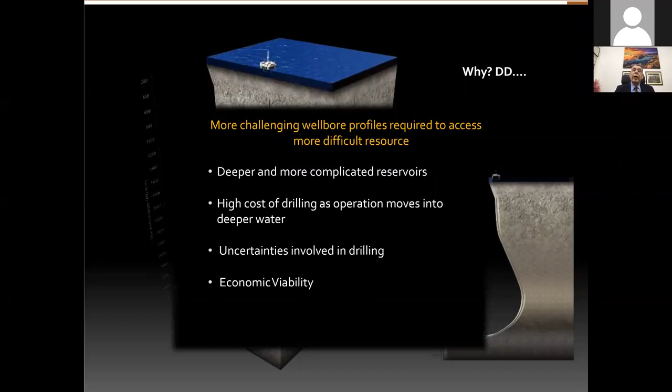How do we drill our wells? In order to access different reservoirs and areas, we use different types of rigs.

Simply, we use land rigs. When we look at it based on the environment, if we're going to drill on land, we use land rigs. If we're going offshore in the waters, we'll use offshore rigs.

Do all rigs are the same? Of course not. Land rigs would vary in size, meaning relying on the depth of the well we actually going to drill. So I may have a rig with the power and efficiency to drill up to 10,000 feet, or a rig that can help me go down to 25 or 30,000 feet. So the type of the land rig will depend on what we actually need to drill.

When we go offshore, things are different. The type of the rig will rely on and depend on the water depths. We could drill wells in shallow, medium, deep, or very deep waters.

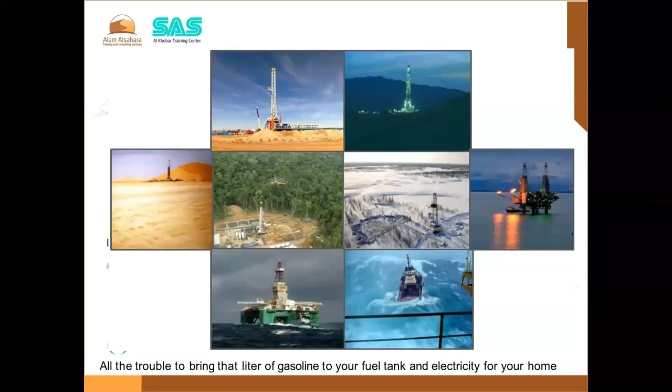Based on that, you'd expect the daily rate, the rental of the rig, is going to be changing. Of course, you're not going to have a land rig with normal capabilities at the same price as a drill ship rig or a semi-sub rig. So the daily rate of the rig, and also we should consider the supporting companies that live on the rig. At the rig site, there would be the rig crew and the rig management, and also the customer representative, and companies like the directional drilling company, LWD company, and so on during drilling. Then during completion and production, specialized people will be on the rig site. So the rig daily rate would vary.

It could be from $10,000 to $50,000 per day, or sometimes the cost is around $20,000 per hour for a more sophisticated semi-sub or drill ship. So the daily rate and cost for deep water drilling could reach up to $500,000 per day. That's why we should have well-planned, engineered wells, so we can actually reduce the cost.

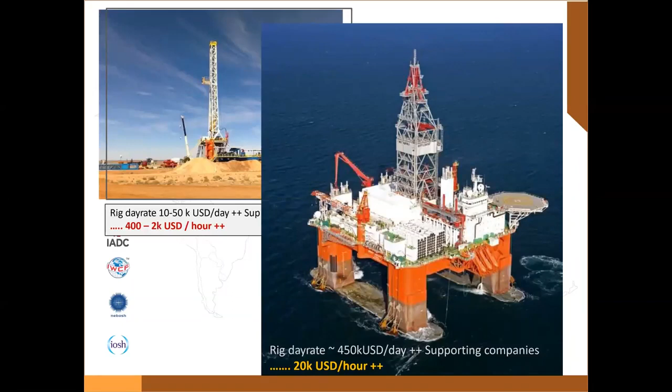What are the key challenges in drilling wells? The challenges include how to identify the wellbore position. We need in a well plan to know where to reach the target. We need to plan sometimes to avoid certain areas like depleted areas, high pressure areas, fractured areas, and faulted areas - that should be in the well plan. We also need to maintain a smooth well profile. This is with regard to identifying the wellbore position.

What about the decision making? The geologist - as the well plan is engineered before the start, the geologist should know from the nearby wells where we're going to drill to. They should know the prospective formations. They should work with the drilling engineers so the well plan reaches the optimum recovery position within the reservoir.

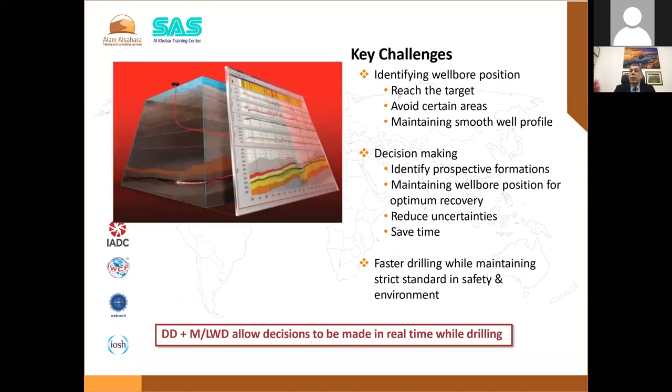We should have more information from the surrounding area to reduce the uncertainties, and all plans should work to save time. Drilling guys at the rig site usually look for faster drilling. We need to drill, but while drilling, you need to maintain strict standards in safety and environment. You need a controlled drilling situation, and this is all reachable.

Then we get to the point that if we're going to see all this and overcome all these challenges, we need to use directional drilling tools plus measurements and logging while drilling tools that will help the on-site specialists, whether a geologist or the drilling people, and of course the people in town, to make real-time decisions.

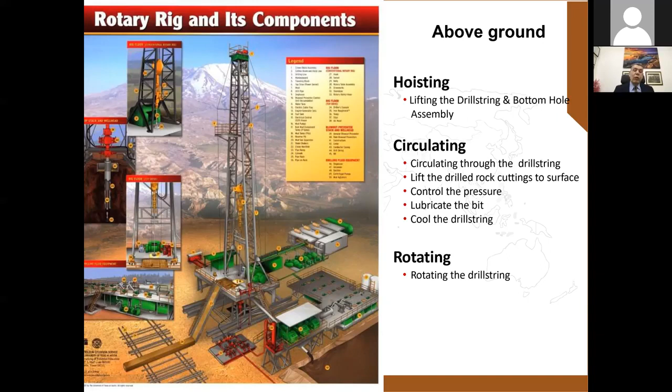We also have rotating equipment that helps rotate the drill string. I'm just talking in general about what rig equipment or components will help us do the job we are looking for, which is drilling a directional well.

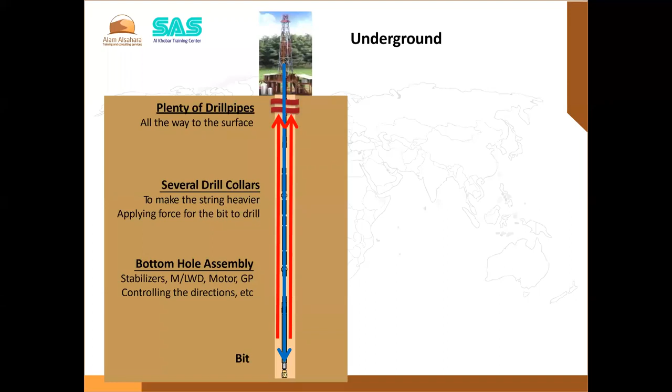The rig is above the surface. Underground, we have plenty of drill pipes. The drill pipes are like the string that connects with our downhole gear, which is what we call the bottom hole assembly, plus measurement and logging tools and directional drilling tools, including motors, rotary steerable systems - we'll get to that later.

So we generally have a lot of drill pipes that we use to drill and reach the depths we want to.

Down near the bottom, among the bottom hole assembly, we also have drill collars - I'll show you soon what the drill collars are - which are heavier pipes that give me more weight, so with rotation I can drill through.

Then there's the bottom hole assembly, which mainly consists of drill collars, stabilizers, and also our downhole gear, which sometimes costs millions of dollars - but it does the job. It's going to be my eyes down there.

The motor, MWD, LWD, and whatever is controlling the well direction sends me more information about the formation. And at the very end is the bit, the tool that will drill through.

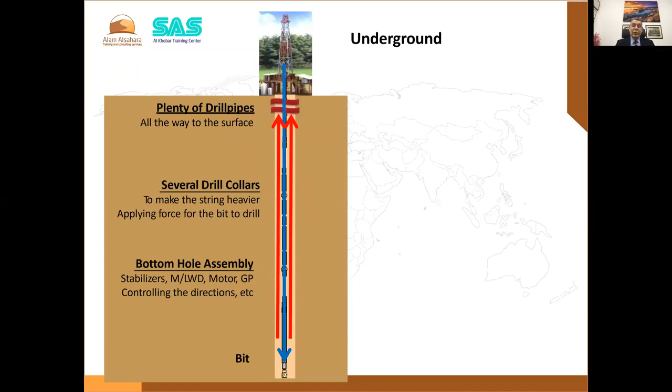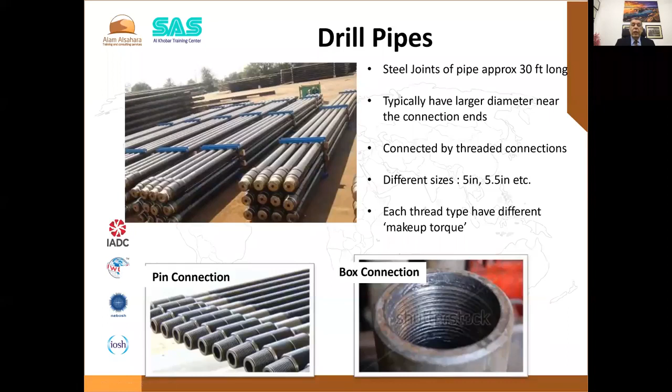Remember, we talked about drill collars. Some drill collars are spiral like this, and some are not. What is best? It's better to be spiral. Why? With hole problems like sticking, I need minimum contact area with the well side. So it's better to have spiral drill collars. Why do we use drill collars? They give us weight downhole. It's heavier pipe with more steel, so I can push the bit down and put more weight on the bit. It also gives stiffness to the string.

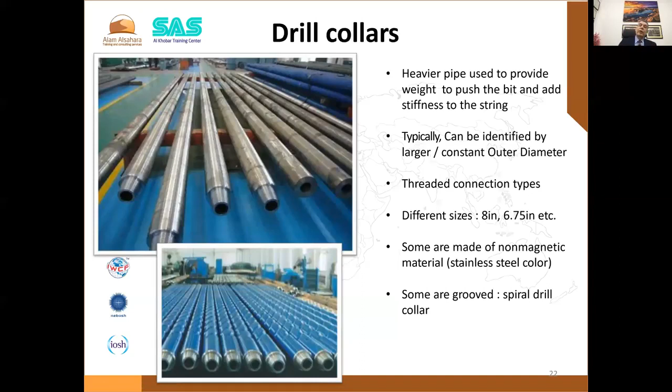Drill collars also have threaded connections, pins and boxes. They come in different sizes based on the hole section. It could be 8-inch, 6.75, or even smaller, depending on the hole size. So we mentioned drill pipes at the top, drill collars, and we also talked about the bit. Now we are missing our MWD and LWD tools, and this is what comes.

To drill the well, we don't just drill one hole all the way down. This is not happening. We drill the well in sections, in stages. We start from the surface with holes like 36-inch. We can drive pipe if it's offshore with friable or loose seabed, or on land rigs. We run surface pipes on land, for example, to cover the underground water. This is what we call casing. We drill the hole and cover it with casing so the hole is not going to collapse. At the surface, we cement it to prevent communication with or polluting the underground water.

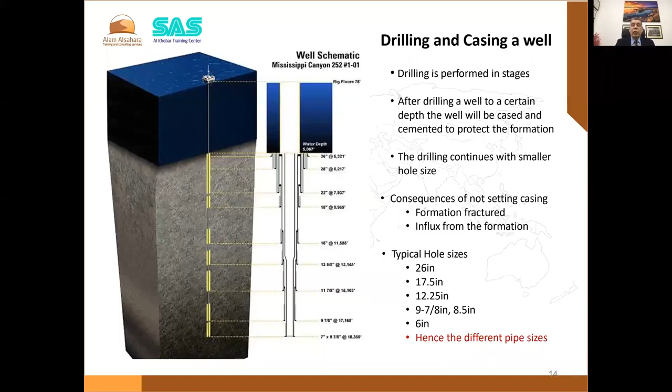Casing run from bottom to the surface is called casing, and sometimes they hang the casing on the bottom of the casing that has been run before, and in this case we call it a liner. All right, let me show you this cartoon video that will show you the rig site and explain a bit about what I have been talking about.

Enjoy. After the well site has been carefully prepared to meet environmental, health, and safety standards, drilling can begin. This is an intricate operation requiring a well-planned infrastructure.

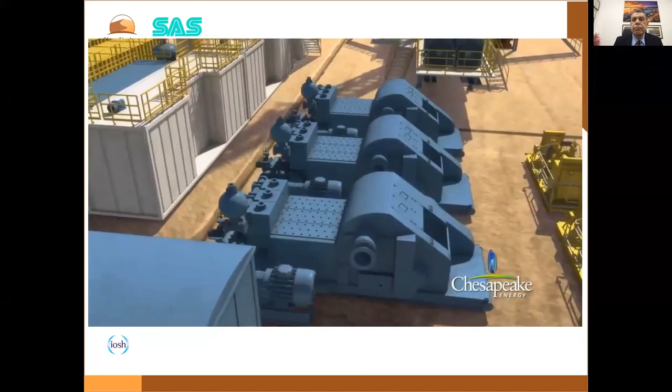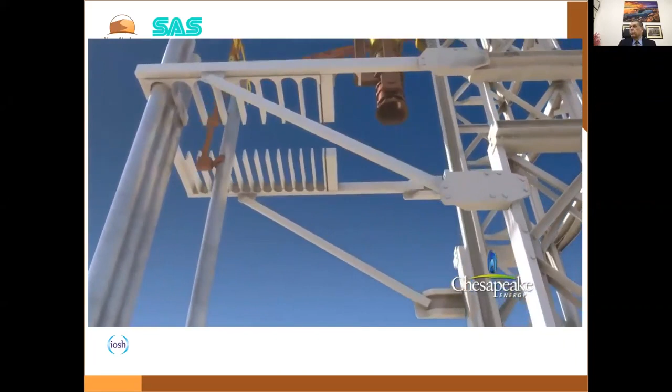A variety of processes and expert, well-trained specialists are used to bring natural gas to the surface. Chesapeake works with these experts during every aspect of the project, while strictly adhering to all individual state regulations. During the drilling process, the rig is in constant operation 24 hours a day, 7 days a week, for approximately 21 to 28 days. As an added precaution in some areas, a protective mat covers 2/3 of the pad site.

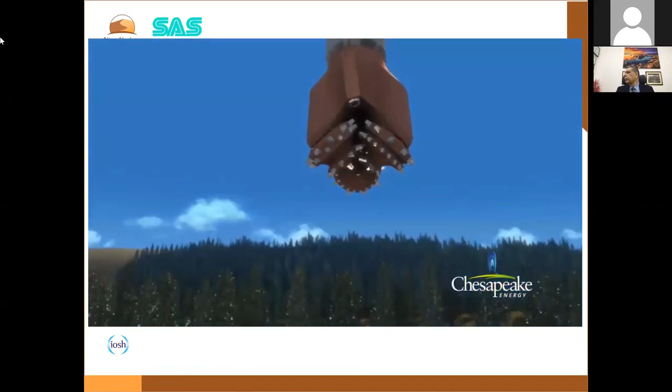Utilizing heavy-duty industrial-strength drill bits, a typical well is drilled in several stages, starting with a large diameter drill bit and then successively smaller drill bits as the drilling is advanced. After drilling each portion of the well, nested steel protective casing is cemented into place. This will protect groundwater and maintain the integrity of the well.

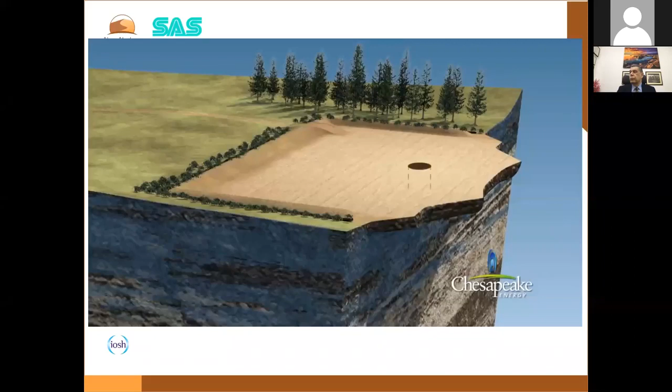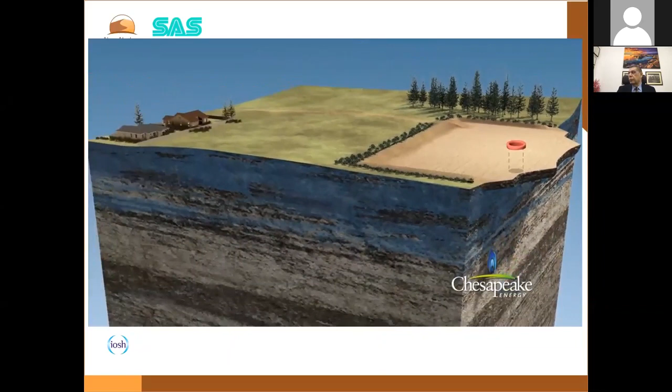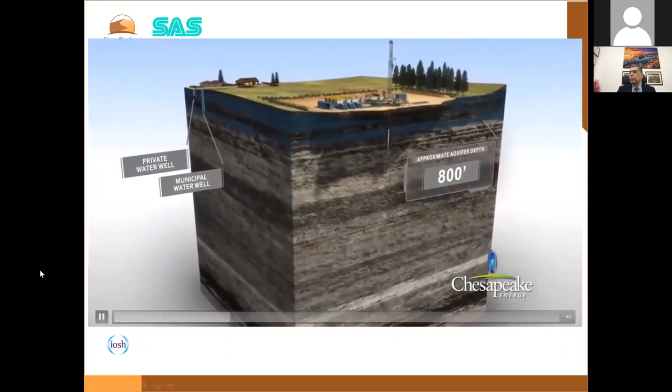Initially, and prior to moving in the drilling rig, a large diameter hole is drilled for the first 50 to 80 feet. Conductor casing is then cemented into place, stabilizing the ground around the drilling rig and wellhead, and isolating the well from most private water wells. In the Marcellus area, the freshwater zone extends to approximately 800 feet below ground. The freshwater zone consists of porous sandstone and rock strata containing water within the pore space of the rock.

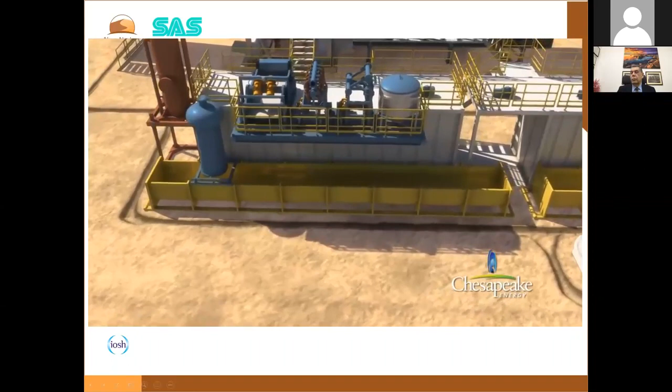Chesapeake utilizes air drilling until the hole is advanced to an average of 100 to 200 feet below the base of the freshwater zone. This provides added protection to the freshwater zone. A series of compressors and boosters generate the air that is used to lift the rock cuttings and fresh water into steel bins. The rock cuttings are then disposed of within state guidelines and permits. The drilling equipment is retracted to the surface and stored for the second stage of drilling.

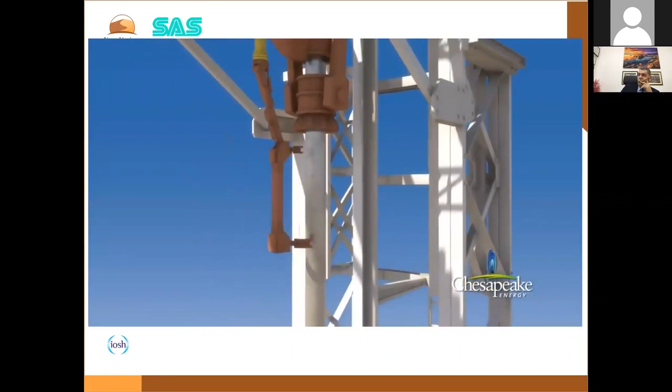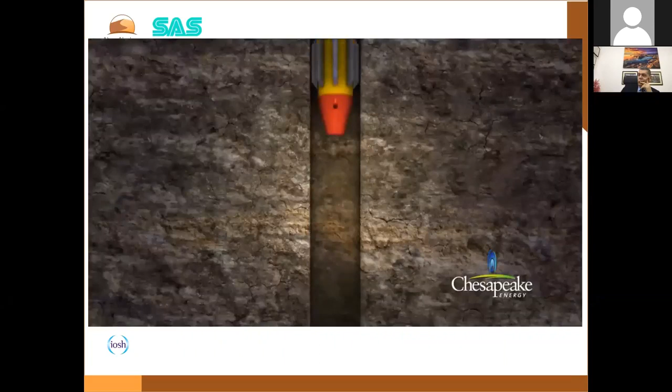To protect the integrity of the hole and to protect the surrounding deep freshwater zone, a second layer of steel casing, called surface casing, is installed and cemented inside the newly drilled hole and conductor casing. Cement is pumped down through the surface casing and up along the sides of the well to provide a proper seal. This completely isolates the well from the deepest of private or municipal water wells.

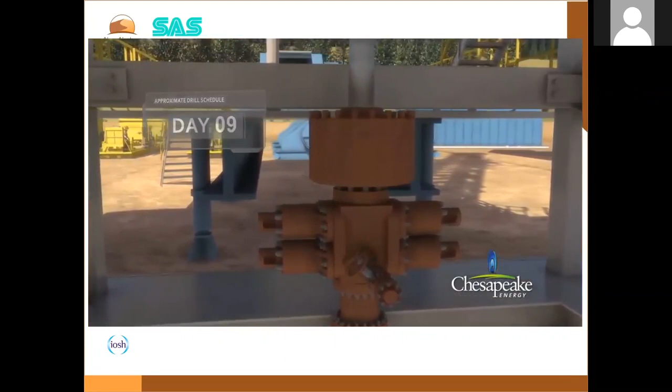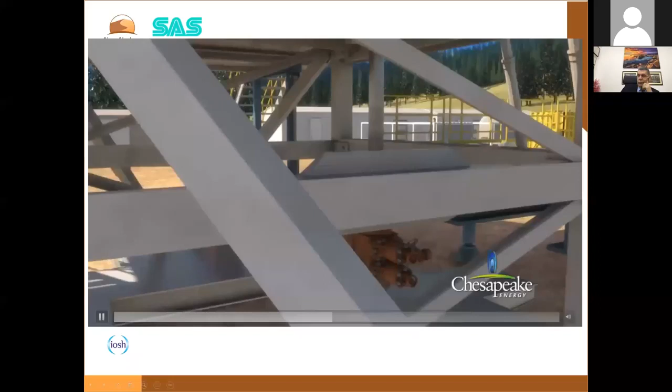A blowout preventer is installed after the surface casing has been cemented. The blowout preventer is a series of high-pressure safety valves and seals attached to the top of the casing to control well pressure and prevent surface releases. Next, a small drilling assembly is passed down through the surface casing. At the bottom of the casing, the bit drills through the float equipment and cement, continuing its journey to the natural gas target area, as deep as 6,200 feet below the surface.

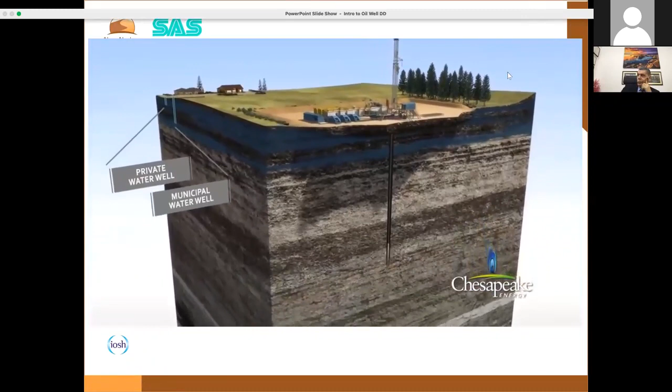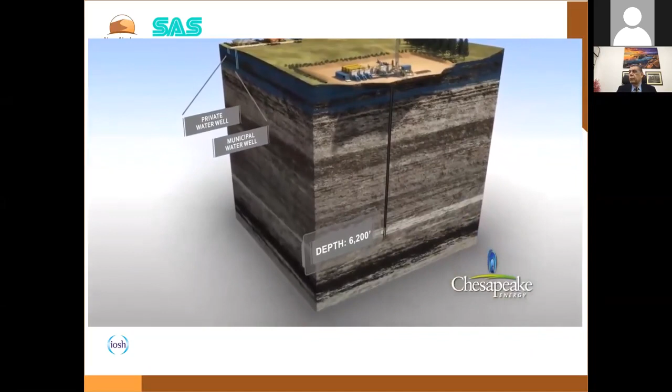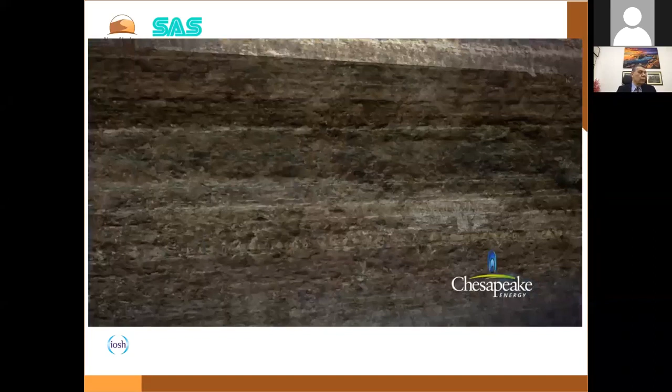The drilling method employed below the surface casing uses drilling mud, which is a non-hazardous mixture based on bentonite clay or synthetic thickeners. In addition to lifting the rock cuttings out of the hole, drilling mud also helps to stabilize the hole, cool the drill bit, and control downhole pressure. A few hundred feet above the target shale, the drilling assembly comes to a stop. The entire string is retracted to the surface to adjust the drilling assembly and install a special drilling tool. This tool allows Chesapeake to gradually turn the drill bit until a horizontal plane is reached.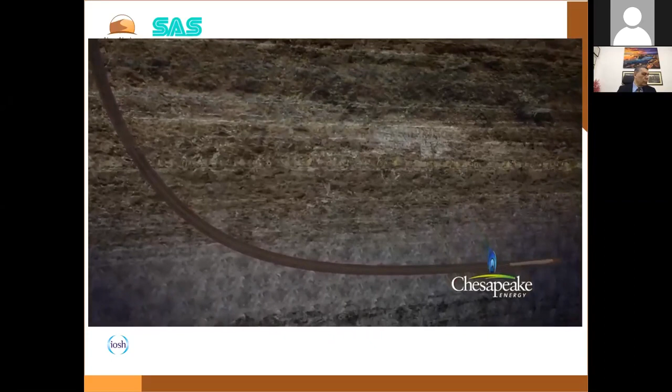The remainder of the well is drilled in this horizontal plane while in contact with the gas-producing shale. Drilling continues horizontally through the shale at lengths greater than 4,000 feet from the point where it entered the formation. Once drilling is completed, the equipment is retracted to the surface. Then, a smaller diameter casing, called production casing, is installed throughout the total length of the well. The production casing is cemented and secured in place by pumping cement down through the end of the casing.

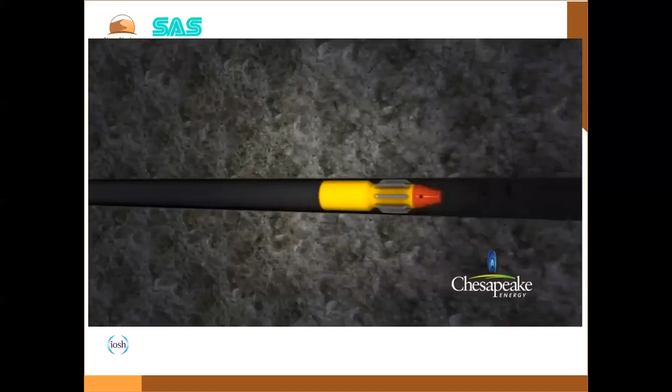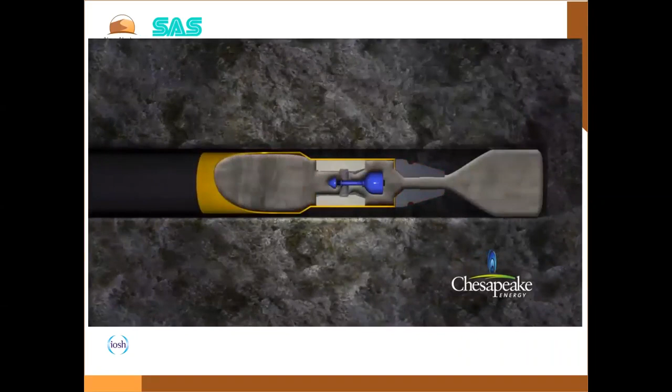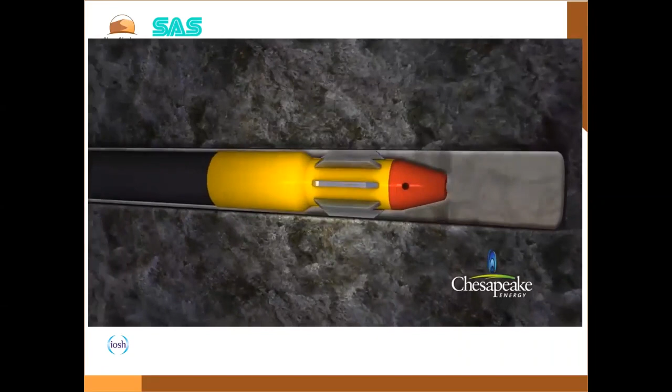Depending on regional geologic conditions, the cement is pumped around the outside casing wall to approximately 2,500 feet above the producing shale formation or to the surface. The cement creates a seal to ensure that formation fluids can only be produced via the production casing. After each layer of casing is installed, the well is pressure tested to ensure its integrity for continued drilling.

A cross-section of the well below surface reveals several protective layers: cement, conductor casing, cement, surface casing, drilling mud, production casing, and then production tubing through which the produced gas and water will flow. 7 layers of protection.

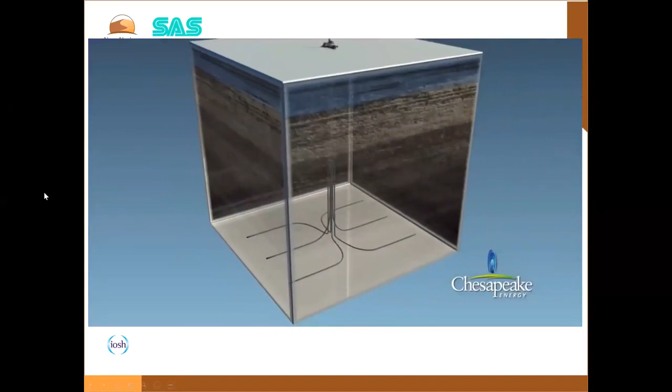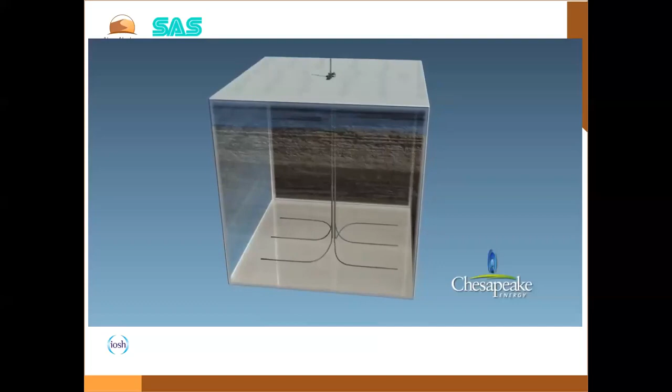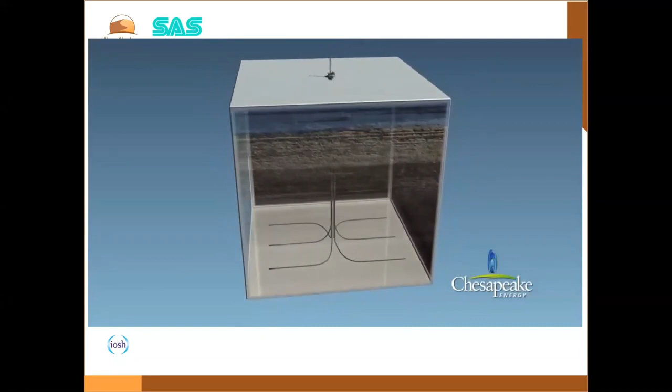Horizontal drilling offers many advantages when compared to vertical drilling. Since horizontal wells contact more of the gas-producing shale, fewer wells are needed to optimally develop a gas field. Multiple wells can be drilled from the same pad sites. For example, development of a 1,280-acre tract of land using conventional vertical drilling techniques could require as many as 32 vertical wells, with each having its own pad site. However, one multi-well pad site with horizontal wells can effectively recover the same natural gas reserves from the 1,280-acre tract of land while reducing the overall surface disturbance by 90%.

All right, so that was the story, the whole story of drilling a well in a few minutes. But unfortunately, this is not as easy as telling a story. It requires real hard work. All right, what should we have to drill such a horizontal or extended reach or deviated well?

We should have directional drilling tools to direct the wellbore. We should have measurement while drilling tools, and these measurement while drilling tools would give me the properties of the wellbore conditions, including inclination, azimuth, pressure, tool face, while the drilling progresses through the well. So measurement while drilling tools would have directional sensors and telemetry.

What is telemetry? If we have sensors downhole that will give me information, I would need this information to be sent to the surface, to know such information and interpret it. And this is what the telemetry or pulsing system will do. Directional sensors and telemetry are usually known as MWD.

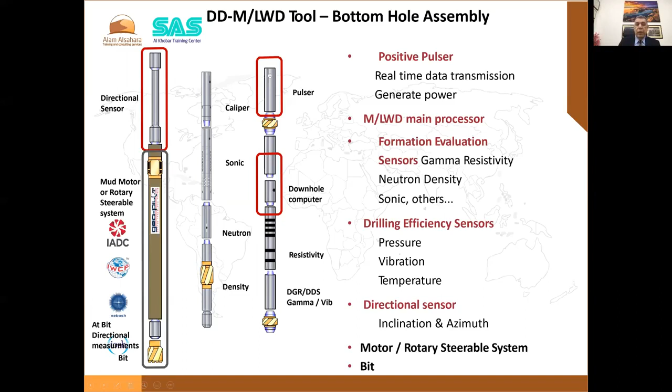All right. So why would they do that? I mean, the operator would pay so much money in getting such very expensive directional and LWD/MWD tools. Why? To reach the unreachable. What I mean by that, to reach the unreachable, actually,

to drill a vertical well, what you can do is just go with a rig that would handle such a depth and have drill pipes, a bottom hole assembly of drill collars and stabilizers and a bit, and go drill a vertical well. But as we have heard through the clip, the production of the vertical well is going to be limited compared to the other wells. So yes, we drill such deviated or horizontal or directional wells to attain more production,

but also there are difficult situations, like we can drill multiple wells from one location, from one offshore structure, what we call an offshore platform. You see that we can have, for example, 20 slots to drill 20 wells that go in different directions, whether to the same reservoir as you can see here, or different reservoirs.

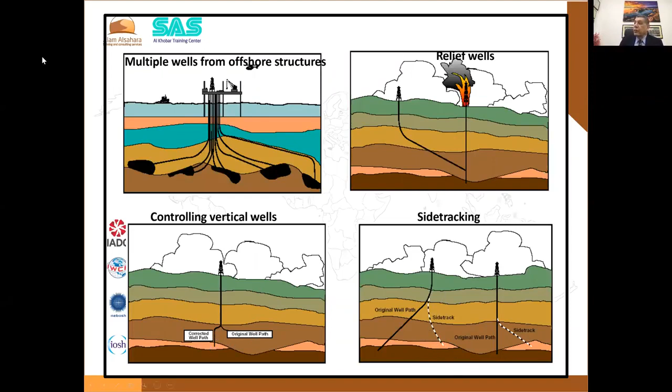So as you can see, there are so many tricks. To accurately reach the required target, which is the reservoir, we should have what we know as well planning software. This well planning is run by a well planner, who could be a geologist or a drilling engineer, and it gives us a precise well plan that helps the directional driller reach the required target.

What do well planning programs do? They usually design the well path to reach the target and satisfy technical requirements. Most importantly, they help avoid collisions, particularly at the surface or sometimes downhole when an area is very crowded with wells, which is a very important stage.

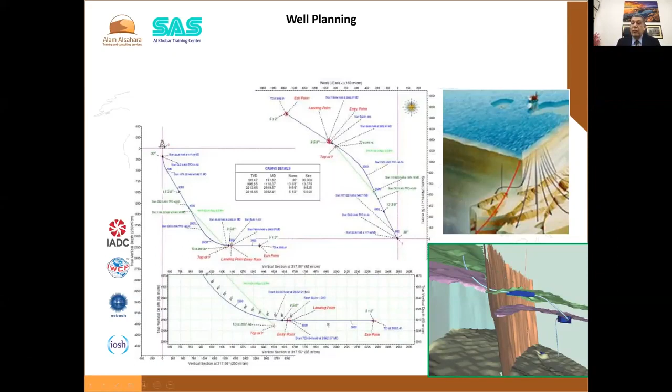So this is well planning. As I said, it helps us have a precise well path and hit the defined target set by the operator. So well planning, and also following the plan.

Following the well plan, the directional driller uses directional drilling equipment to help us reach the target, not go anywhere and nowhere. Imagine what would happen to the directional drilling if we did that. This still happens sometimes.

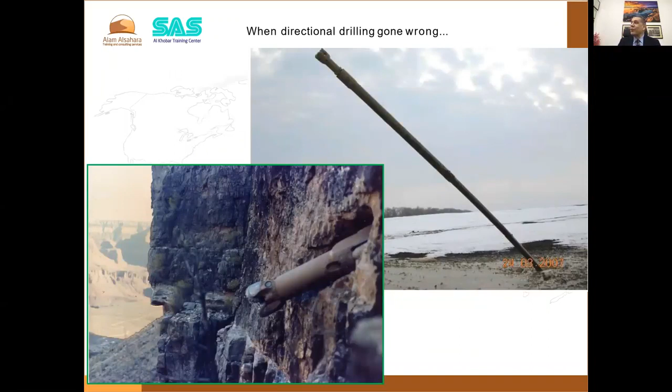That's why we use LWD and directional survey. We use directional survey equipment to know where we're going downhole.

How do we know where we're going downhole? We should have the inclination, the angle, which is the well path angle from vertical. And we need the direction, or azimuth—where the wellbore is directionally from true north, or sometimes at the surface, magnetic north. Usually we need to know where we are relative to north.

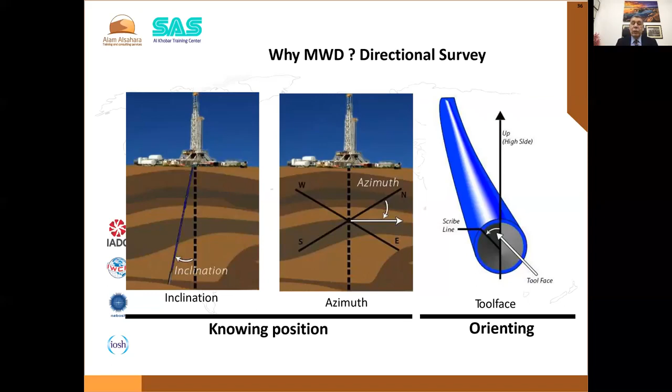How do we actually build or drop angle downhole? A third piece of information is needed, which is the tool face. The tool face helps us orient the bit—it tells us where the bit is with regard to the wellbore high side. So the tool face tells me I'm going toward, for example, southeast 20 degrees, or exact north, or exact south, and so on. The tool face is the tool that helps the directional driller orient his tool and get to the target.

Some survey definitions you may be familiar with: rig Kelly bushing. Kelly bushing simply tells us where the rig floor is. The Kelly bushing refers to the Kelly, a tool used on a normal rig to rotate and drill through—so it's essentially like the rig floor.

Kickoff point is where we start to deviate from vertical, then comes the build section, where we build angle in the well path. End of build is when we stop building angle and hold it—that's what we call the tangent or holding angle. Say we've reached, for example, 45 degrees, and we hold 45 all the way to this point. Then we start the drop section, where we drop the angle to reach the target.

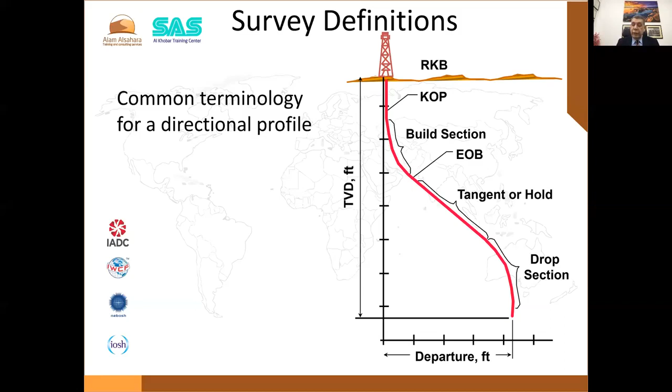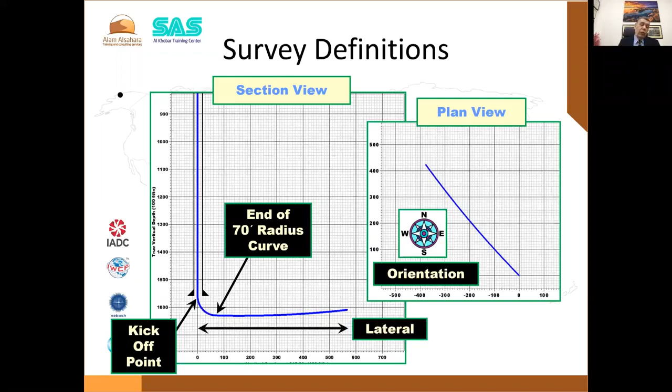Well paths could be drawn like this with a section view, or by coordinating a plan view to show the orientation. In this type of well, because we kicked from vertical real fast, we know it's short radius. We consider this the kickoff point, then we build very fast, end of radius curve, and this section is the lateral section going through. Usually the lateral section would be through within the reservoir.

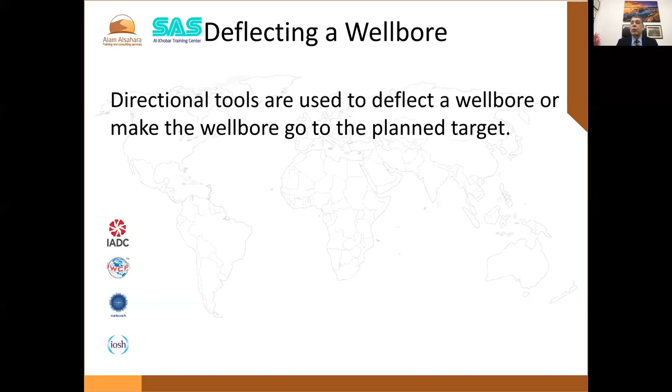Now we get to the point of how directional tools work, how we deflect the well, how we get such a complicated plan downhole done and completed, how we reach a point that is sometimes very few kilometers away from the rig site, with big depths downhole. Directional tools will help us go there and reach the planned target.

What we use to deflect the string downhole, we use what we know as whipstocks, rotary bottom hole assembly, motors, and rotary steerable systems. Right now we use all of these based on the situation, based on cost, and so on.

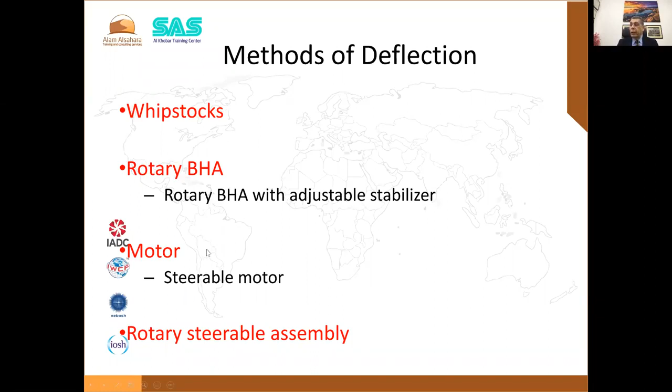A whipstock is a wedge like this, a metal wedge, and this is one of the earliest tools we used to drill. The whipstock is set downhole using a directional tool as well, because it's going to be set in a specific direction. This shows how the whipstock is set inside casing, and the primary use for a whipstock is to sidetrack.

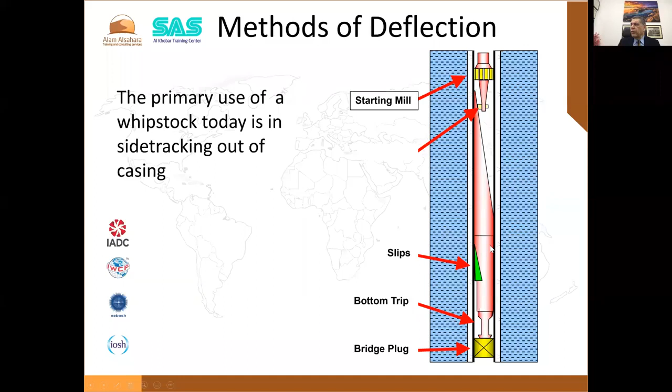We mentioned some of the uses for directional tools is to sidetrack. So how to sidetrack using this metal wedge: we start with a starter mill, which is kind of like the bit but able to drill through the metal, to deflect or open a window through the casing. This requires two trips. We use the starter mill to start eating through the casing wall, then we run back with a heavier window mill, and on top of it a watermelon mill, and that will drill through and open the window in the required side and direction.

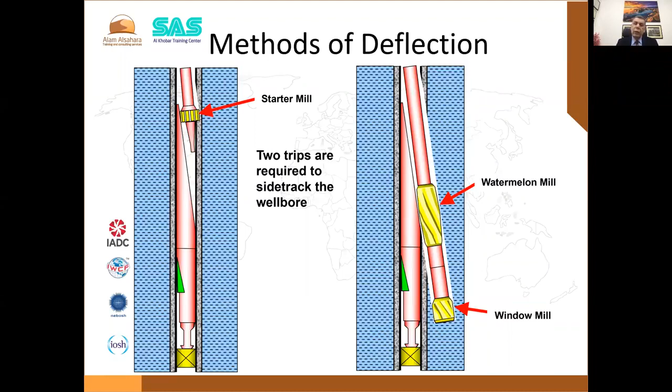Opening a window requires specific tools, because we're drilling inside metal, so there would be interference, magnetic interference. So we use specific directional sensors like gyros that are not affected by the metal, to show where we are and where the window is going to be drilled.

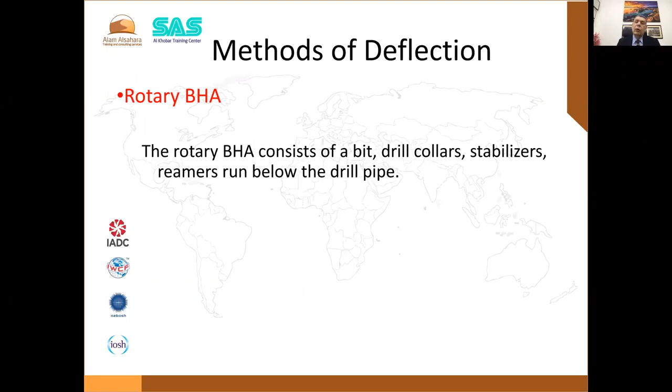The second deflection method is a rotary bottom hole assembly. What we mean by that is we design the bottom hole assembly from drill collars and stabilizers by placing the stabilizer at different locations, so we can build, hold, or drop angle. How is that? This is interesting.

We use a near bit stabilizer, which becomes a point to rely on to push the bit when we put weight on it. So for building, you would notice that we need to have a near bit stabilizer. We can also have a dropping assembly, and a holding assembly. How does this assembly look like?

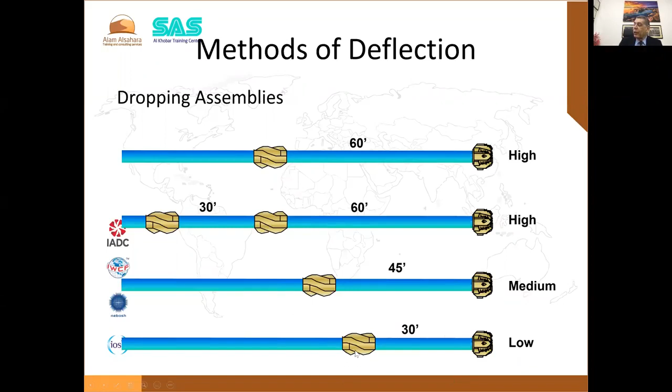Dropping assemblies: when we get to a drop assembly, what you can see now is no near bit stabilizer. Why is that? You actually move the center point, the point you rely on when you put the weight. The weight comes on top of this point, and this bar is going to bend. But when it bends, the bit will go down. This gives very high drop, with 60 feet between the bit and stabilizer, and as we said, no near bit stabilizer. Based on the location of the stabilizer, the dropping is going to be done.

Hold. When you want to hold, what do you do? Put more stabilizers and less collars. See that? Four stabilizers, less collars between the stabilizers, so you can hold the angle as is, very stiff assembly.

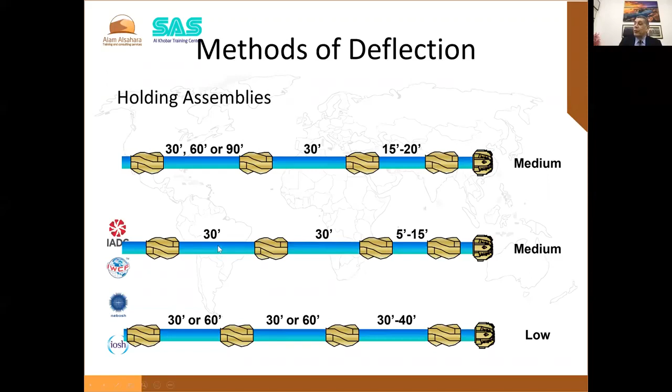Bottom hole assembly as deflecting. We initially mentioned whipstock, then bottom hole assembly configuration, and we can actually use an adjustable stabilizer. What do we mean by adjustable stabilizer? A stabilizer that could be adjusted to specific blade sizes.

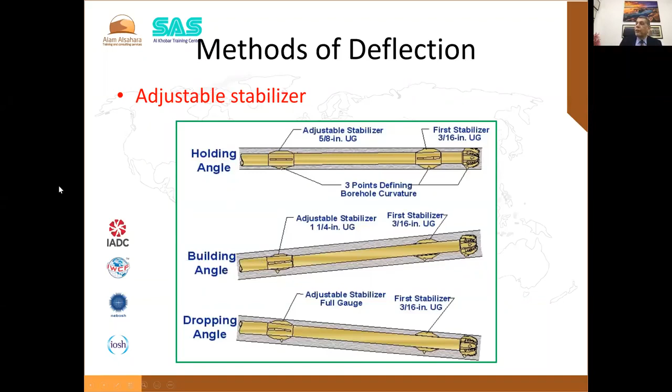This is how the adjustable stabilizer gauge works. Usually this is when the pistons are retracted using pressure and weight. String weight would activate the adjustable gauge stabilizer and push the buttons up to the specific stabilizer size that is required.

So we mentioned whipstock, we mentioned bottom hole assemblies, stabilizers and collars, we mentioned adjustable stabilizer. Here we go, we come to the motors, mud motors.

And mud motors, I've seen all that, of course. I've been in the field from 1980 to maybe 1996. So I've seen things developing real fast. I mean, late 70s, what we used to have, the motor was a straight tool, all right?

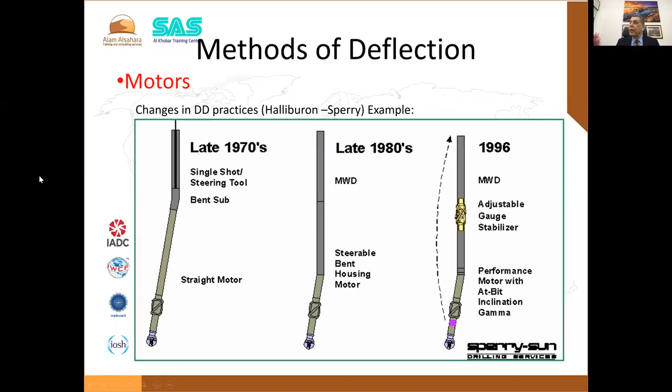You gotta excuse me, I'm a Halliburton guy, I've been with Halliburton for a long time, so my examples are from my mother company. But all equipment relies on very much the same designs. So whether you go to Schlumberger, Baker, or whatever, tools rely on the same designs, but different tools have different capabilities based on the company.

Inside the steerable motor that we have right now - they call it a positive displacement PDM motor - usually the fluid flow drives the inner rotor inside the stator. The outside is the stator, and this is the rotor. If we're going to talk about motors, we may talk for hours, so I'm just giving you a simple idea.

This is meant to be an overview, an introduction to directional drilling. In-depth courses could be attended - we actually have such in-depth courses to advertise and can provide more information about it. But I'll give you the flavor of that business. This is what I meant by this course or webinar.

Usually the rotor rotation inside the stator of the motor is transferred to the bit through different parts. The bit is rotated using the power of the fluids that rotate the rotor inside the stator. And when orienting to build angle, the entire drill string is not rotating.

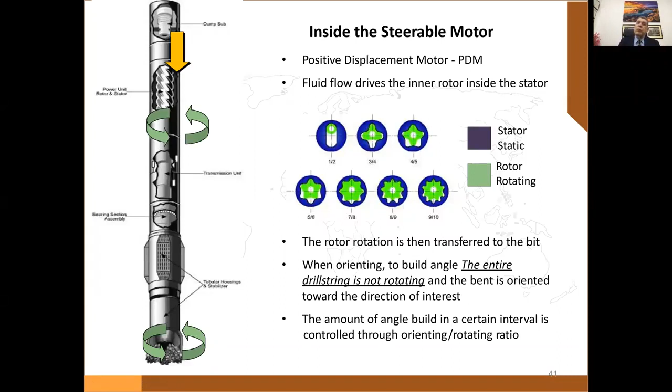That is going to be done for a specific interval. And when we do that, we can actually use two methods of drilling - we can either slide or rotate.

When we slide, we're not rotating the string. We push the bit downhole. The bit is rotated by the fluid and power inside the motor, and we push the bit toward the high side to build the angle based on the interval needed to be built. When we want to hold the angle, we usually rotate the whole string.

So when we look at the steerable motor configuration, as I told you, the steerable motor would have a bent housing that would change the direction when sliding the drill string. The bent housing right now could be manual, or that needs to be set up and fixed at the surface.

But right now, what we have are steerable motors that can actually change the bend of the motor downhole using the mechanism of pressure and weight.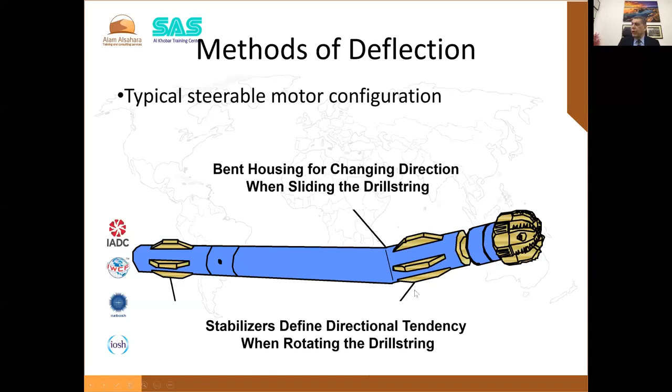We also use stabilizers on the motor to define the direction tendency when rotating the drill string. So the stabilizers on the motor will help us to hold the angle or drop, depending on what we need to do.

Remember, I told you this is the manual bent housing, and the motor would come straight to the rig side. What the directional driller does is bend the motor to the required bend degree, which could be adjusted from 1 to 3 degrees. Usually he breaks between these two bonds and then adjusts the angle. For example, this is aligned with this one, so it would have a 2.98 degree bend - you see that these lines go align with each other.

There are four main components for that bent housing: offset housing, splined mandrel, stator adapter housing, and adjusting ring. Just more information about it.

How we use the motor, how the motor is gonna do the job for me. As you can see here, remember we said Kelly bushing. This is the Kelly, and this is the bushing of the Kelly. This is an old rig. Using the motor, what we do, as we mentioned, we circulate the mud, so the bit rotates, driven by the flow inside the mud inside the drill string.

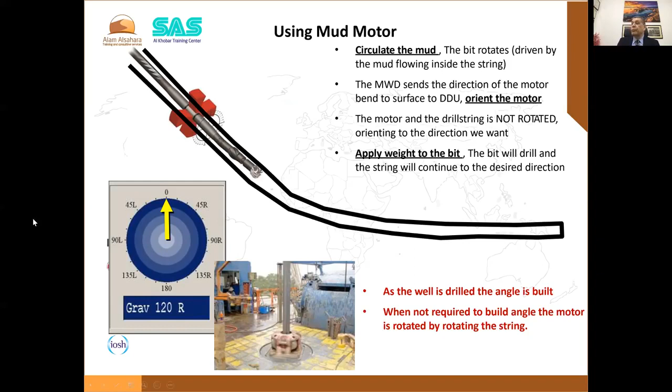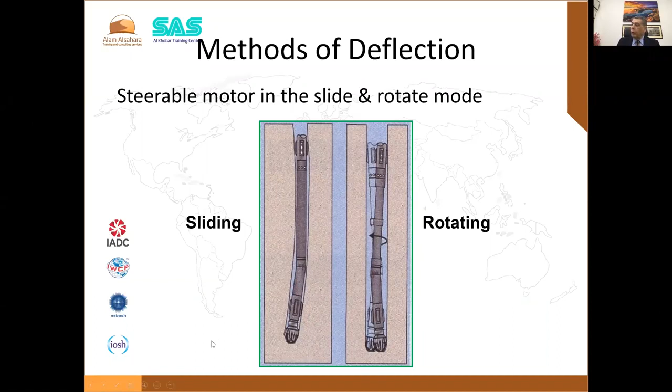The steerable motor, when we slide, we build the angle or drop based on what we need to do, with no rotation for the string from the surface. And when we rotate, usually we rotate the whole string. This drawing will show you that the string is rotated.

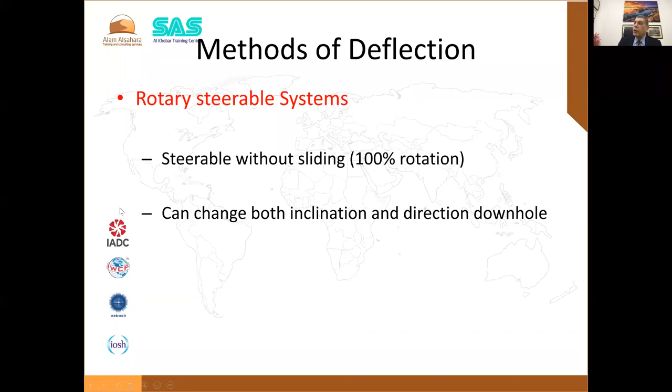Okay, the last method of deflection is the rotary steerable, and this is the latest technology. What the rotary steerable will do is steer the well. We mentioned that the mud motor would need me to do a slide in order to build or drop, and rotate when we need to hold. But with the rotary steerable, no sliding is required, we rotate all the time, and we can change the inclination and direction downhole. So everything is controlled from surface equipment, which will change the bend of the rotary steerable downhole.

Rotary steerable systems, as I said, crooked holes could happen with sliding and rotation, dog legs and all that, but rotary steerable systems would help drilling a smoother wellbore with less problems. Tool face adjustment could be done real time, giving faster rate of penetration compared with the sliding mode. In sliding mode, sometimes with some formations you may drill 1 foot in a couple of hours or more, sometimes faster. Drill string with rotary steerable system maintained in constant rotation, which will improve hole cleaning and minimize the chance of differential sticking.

Designing rotary steerable systems depends on 2 ways to perform the directional change. One way is called push the bit, which is how to deflect the bit by pushing the tool collar using pads in the opposite direction. So there's a pad in one direction that will push the bit to the upper side and so on. But point the bit is more advanced, it deflects the bit off center, and I will show you point the bit. I'm interested in that.

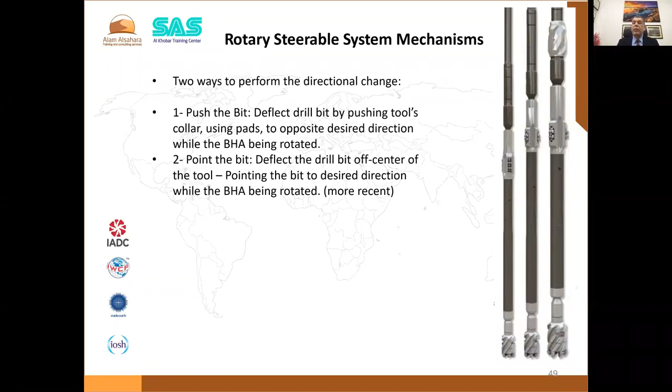This is what most rotary steerable systems have right now, pointing the bit to the desired direction while the bottom hole assembly is being rotated, and this is more recent. Here's how point the bit works, and this is the Halliburton Geo-Pilot tool diagram. We've got an eccentric ring over here that actually will direct the bit toward a specific angle.

The rotating inner shaft, in this case, is deflected at the center between the bearings with dual eccentric cams. This will result in tilting the bit in the opposite direction. The tool will give you deflection percentage and tool face direction, and you get that real time, and you can also change that deflection. So inside the rotary steerable tool, the bit is actually deflected, and you can rotate the whole string all the time to build, as I have mentioned. Easy, simple, everything you see and control from the surface.

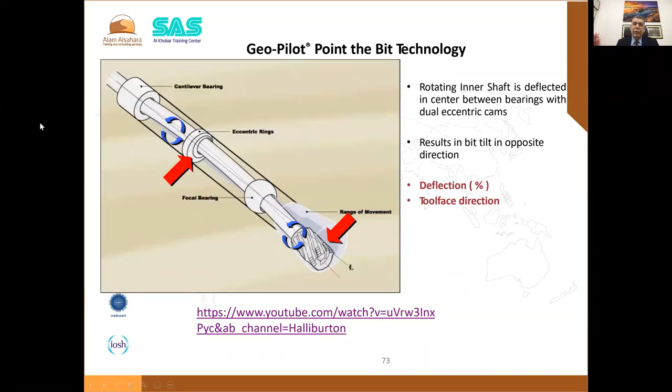Finally, we're going to look — I'm sorry we took more time than I expected — so finally, we need to look at the rig site setup, how the guys set up their equipment at the rig site. And I know the guys that actually have been working, I've been in the field for over 15 years, doing different jobs, as I told you.

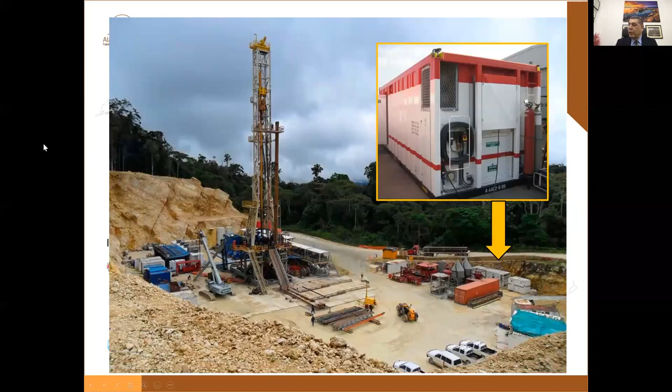So at the rig site, the guys will rig up. This is a unit for the MWD and directional drilling guys, and usually sits on the side of the rig at a safer zone, just like that. This is a rig location, nice location, got greens and all that — you'd be lucky to work there. All right, so what is required, how those guys rig up or place their sensors to get information.

MWD or LWD guys usually will have a cabin to work at, as I said. The cabin would be pressurized, and it would be set inside at a location, whether offshore or onshore. Those guys have to rig up depth tracking sensors, all right? And depth tracking sensors could be a drawworks encoder. This is the easiest and best one. You actually set it up, I'll show you some, on the drawworks.

standpipe area. Driller display unit. Remember, there should be a display or a screen to show the driller the information coming from downhole. And also, at the pumps, they rig up what we call a pump stroke counter that filters noise from the system. All right.

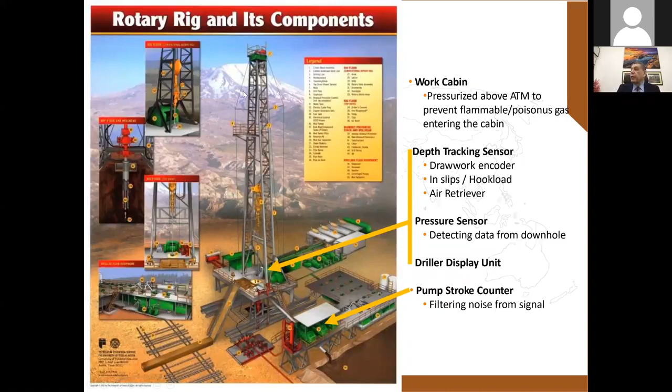Okay, see what I told you? All right, this is a pressure sensor here, what we call a pressure transducer, usually installed on the standpipe here and here, and at the pumps and at the gooseneck. The pressure transducer, this is how we get the signal.

What is mud pulse telemetry? Usually the tool has a pulser downhole, which either vents or restricts the pressure to give a negative or a positive pulse inside the drill pipe. And this pulse would be sent to the surface. The combination of the pulses or the length between the pulses is actually interpreted at the surface computer to numbers, values, and so on.

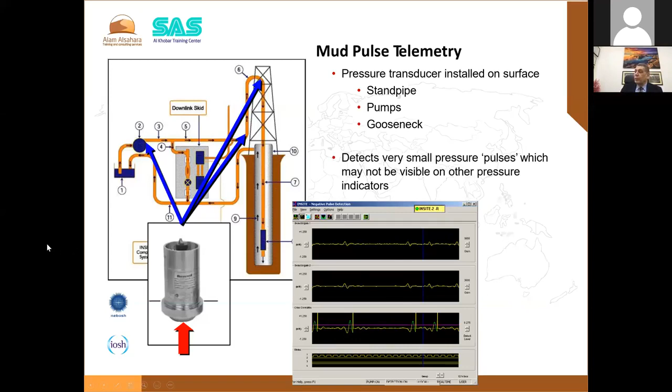Okay, depth tracking system. As I told you, this is the recent one, and of course, I was so happy to see the drawworks. Why? Because I'm going to rig it up at the drawworks on the rig floor. And in early days, I used to take a depth sensor and set it up on the crown over there. I used to go up the derrick, up to the top, to the crown, to rig up my sensor. So you see how easy it actually is setting up the depth tracking system on the drawworks.

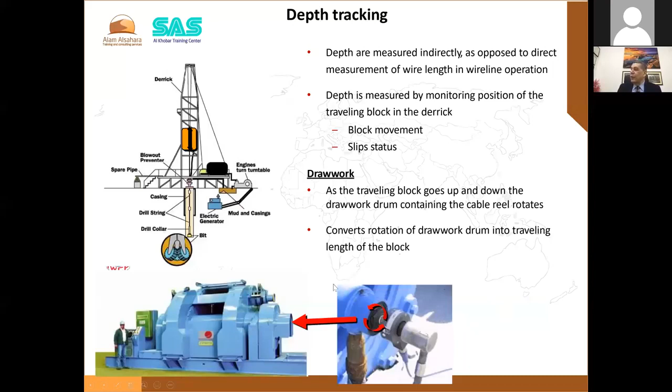What is it like in the field if you're going to be an MWD or LWD engineer? All right, you got your tools. This is a tool, the formation tester tool, and one of our Halliburton colleagues there, or any other company. So this is a tool they actually prepared to run in hole, MWD formation tester. And before that, there's a guy inserting the battery inside the tool, or actually doing his measurements for a directional tool, preparing it before running in hole.

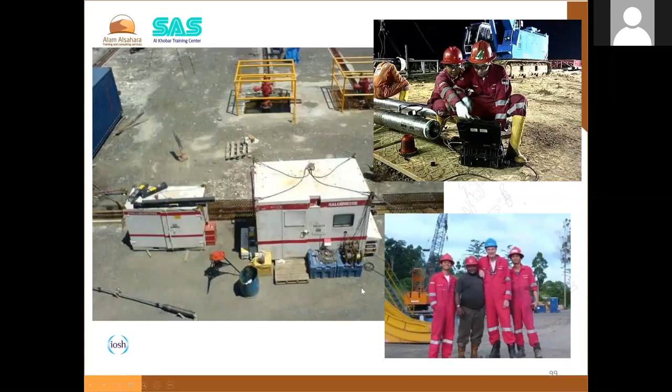All right, the guy is doing different activities, testing their tool over here, and their unit and toolbox. And this is actually what I call the MWD pulser, MWD tools. I've built so many of those, and sometimes we take a break and take pictures. That land rig is good, no problem, okay? But what about offshore?